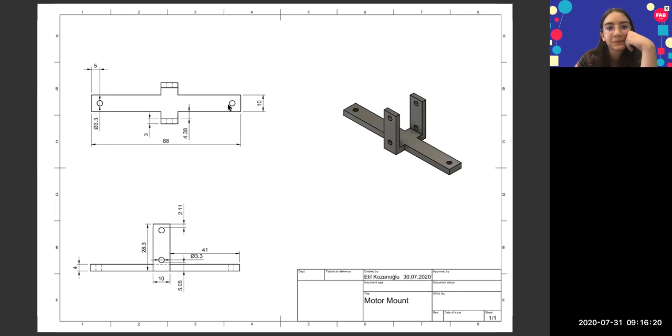First, we're going to start with 3D designing parts of our robot. For that, open Fusion 360 software on your computer. It should look like this after you created your account. First, I want to show you a demonstration of what we will design.

Unfortunately, because of our limited time, we're not going to be able to build this entirely. But we will be able to design the motor mount you see over here and the chassis. So let's start with the motor mounts.

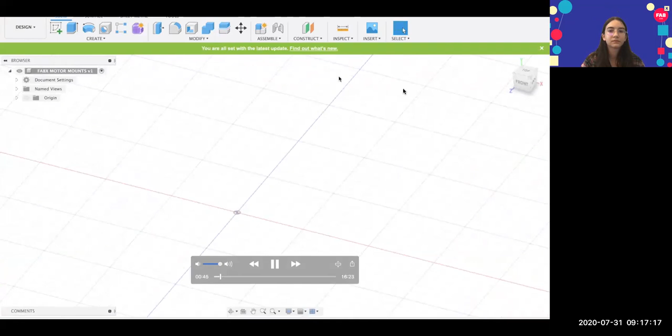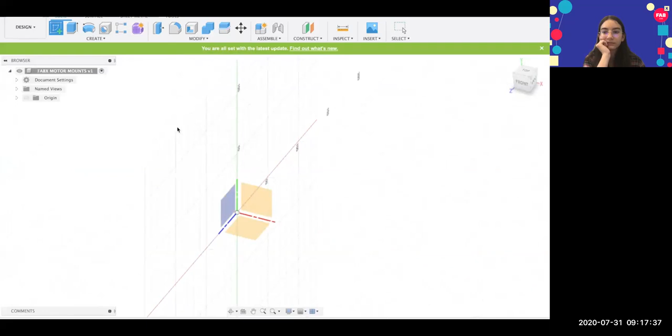I'm going to start with creating a sketch, which is a 2D drawing to define your design and be made 3D later on. To start our sketch, I select Create Sketch from the Create menu, or you can just click on the sketch item right above the create menu. Now I select which plane I want my sketch to be on, which is XZ for our case.

As you can see from this bar, we're in the sketch mode. So our create menu has tools for sketch design, like this. I will first sketch the base, which is this part.

So for that, I first need to draw a rectangle. From the create menu, I go to rectangle, then to 2-point rectangle, or simply press R on my keyboard. Now my cursor has a cross attached to it.

I click on the point I want my first corner to be, which is the origin point for our case. Then I could have dragged my cursor to the second corner, but since we have exact measures for a rectangle, I will put those parameters in.

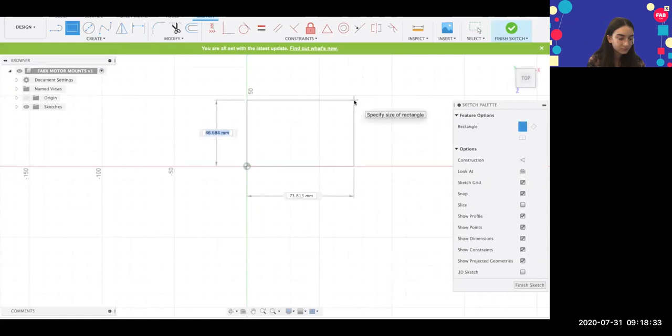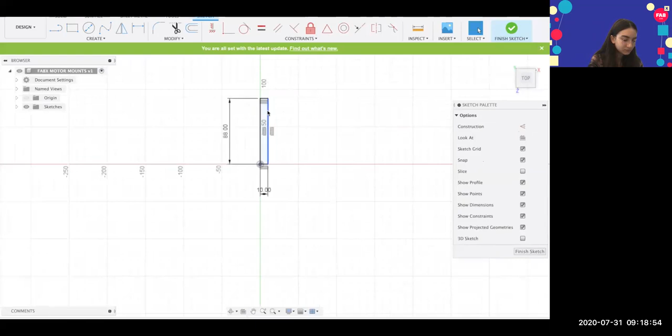The length will be 88 millimeters. Then I press the tab key on my keyboard to specify the width, which is 10 millimeters, and lastly press enter to finish the rectangle. So it should look like this when you're done.

Now we're going to create another rectangle parallel to this one, which will represent this length over here. So I go to the create menu, select 2-point rectangle from there, and choose a random point on the edge of this rectangle to specify as my first point.

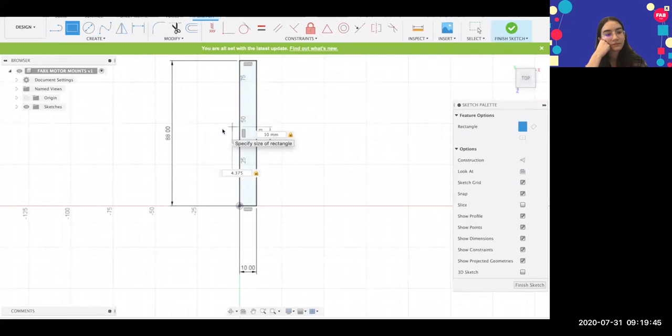It will have a length of 10 millimeters and a width of 4.375 millimeters. So I press tab and then write 4.375, and I'm done. So I put in the length value, then press the tab key on my keyboard and then put the width. Well, I told you to create your rectangle at a random place.

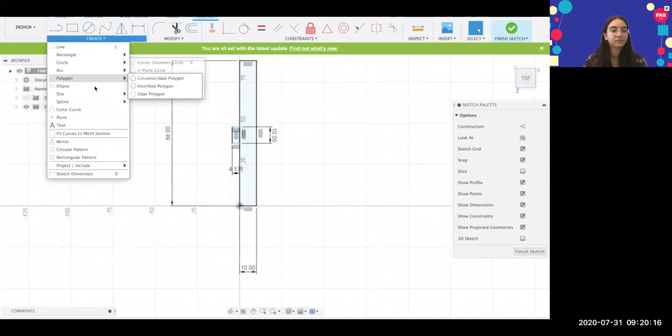But on the motor mounts, as you see over here, their place is specified. To move our smaller rectangle over here to a specific place, we could go to the create menu and then sketch dimension, or simply press D on your keyboard.

With this specific function, we can adjust the measurements of our sketch. I want my rectangle to be exactly 41 millimeters away from this corner. So I select this corner and drag my cursor to select this edge of my smaller rectangle and drag it along this way.

And hit enter. Okay, so now I think you should be able to draw your sketch and do the things I did. If you have questions, ask them on the chat. I want to give you some time to finish your sketch until this point. If you downloaded and created a Fusion account, it would be great if you did it with the video.

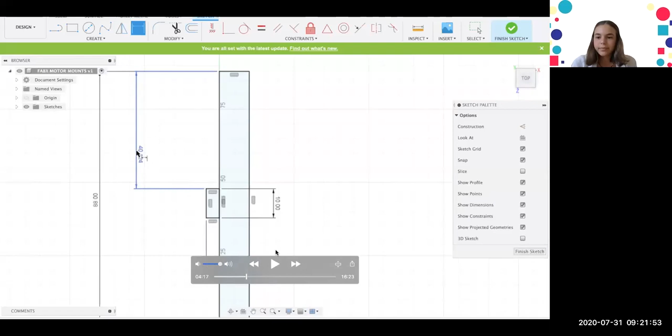Okay, so if you have any questions, please ask them in the chat. And if there is no question, we could continue, or you could say stop for another minute or something. I think we continue, Elif. Okay, you can write in the chat, right? Participants can write in the chat. Yeah, if you can't, you can just unmute yourself. Okay, we can continue. Okay.

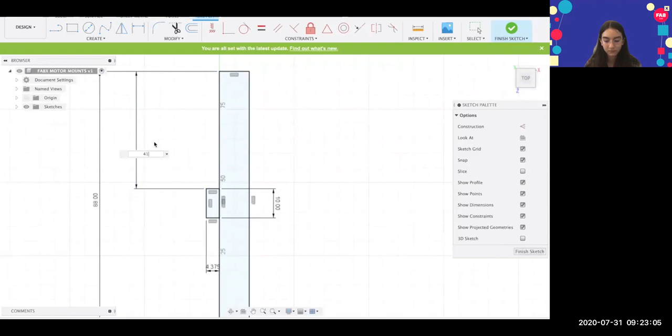Now it shows me the length between this rectangle and this corner. To adjust it, I double click on the dimension and enter whatever I want it to be, 41 millimeters for our case, and hit enter.

Now I will draw another rectangle right behind this one, so it will be over here. This length will be 10 millimeters again. So I go to the create menu, rectangle, 2-point rectangle.

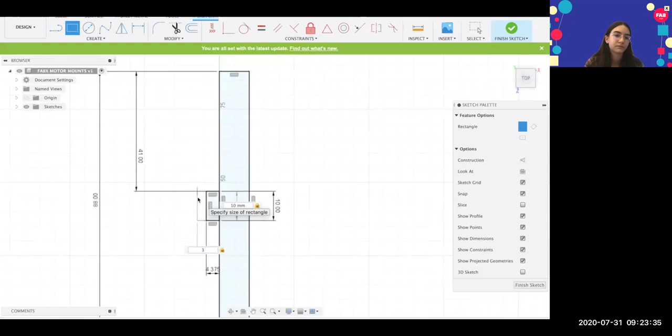This length will be 10 millimeters. Then I press tab on my keyboard and its width will be 3 millimeters and hit enter. So this rectangle will be right here, this part. It is drawn as another rectangle because it will be higher than the base, so its height will be different.

Now we must do the same thing we did here for this side as well. But doing things over and over may be a very inefficient use of time. Fortunately, Fusion 360 has a great function to make things go faster. It's called mirror. The mirror tool requires a symmetry line from which it will reflect desired elements.

I will create my symmetry line from the middle of this edge. So I select the line tool from the create menu and click on construction on my sketch palette. You don't really need to click on construction, but I use it because it separates the main parts of my sketch from the parts that are only for constructing other elements.

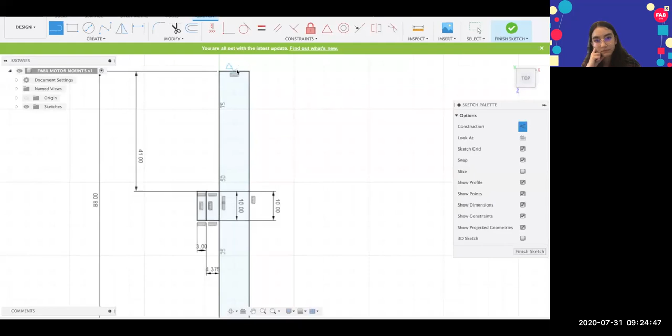I drive my cursor to the edge, across this edge, and stop when I see a triangle or delta sign right above my cursor. This shows that I am currently in the middle of the line. So I click on that point and drag the line all the way down to the parallel edge with 90 degrees and click again. Now that I have my mirror or symmetry line, I go to the create menu. So here you can draw your construction line, and then we're gonna move on to the mirror tool.

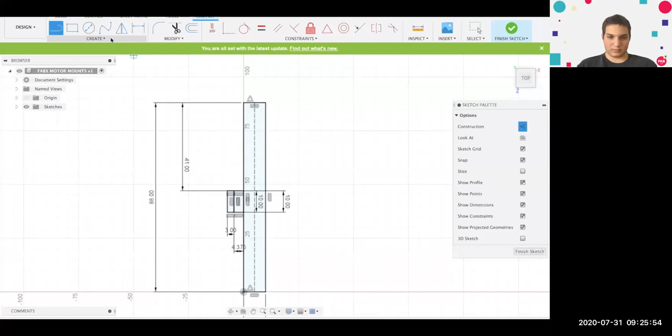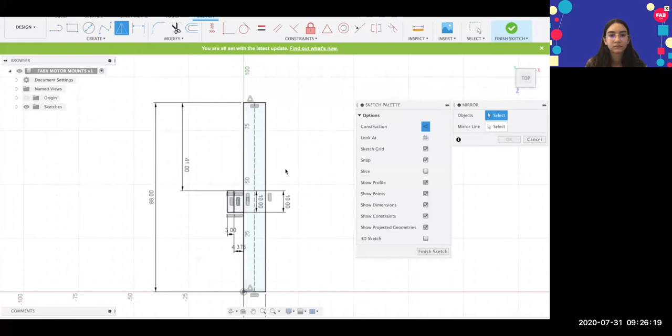And select the mirror tool from there. Now you see objects over here. It asks me what parts I want to reflect, so I choose every single line on this side. Let's make it a little bit bigger. After I selected all of them, I go ahead and click on where it writes mirror line and choose the construction line I drew earlier, this one. Now click OK, and we should get the rectangles right on this edge as well.

As you may have noticed, our sketch looks a bit messy because of these constraints Fusion 360 adds as a default. To avoid this, we should simply uncheck the box where it says Show Constraints.

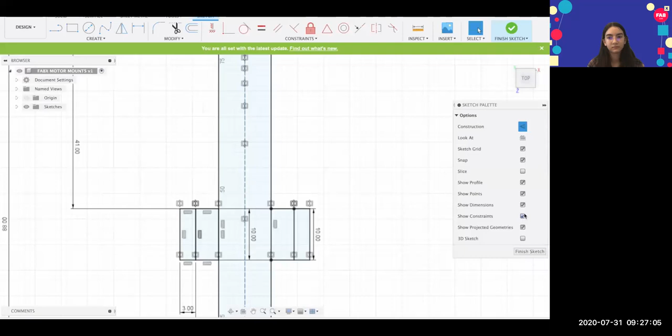And now they're gone. Okay, so if anyone had any problem with the mirror tool, please unmute yourself or ask your question in the chat.

Okay, I have a question here. Although it might not be relevant here, but I want to ask about Fusion 360. Have you made any comparison between Fusion 360 and SketchUp? And which one do you think suits you best?

Well, I can comment on that. SketchUp is generally used for architecture, and sometimes the STL files that are exported aren't suitable for 3D printing. So for robotics, I think Fusion 360 is better. I'm not sure about SketchUp, but Fusion 360 is a parametric modeling tool, so it has a timeline, and you can edit your past actions, and the design will update accordingly. So it's better for complicated designs.

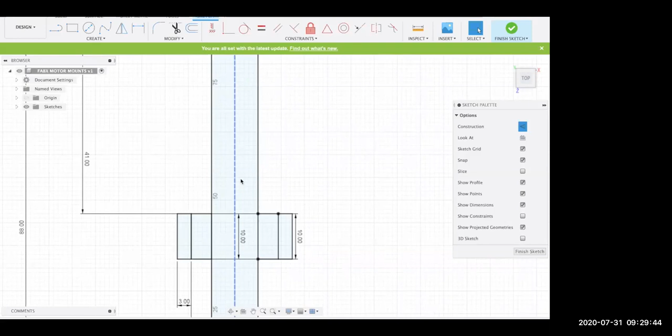Okay, so if there aren't any questions, we're gonna move on. Now let's draw these holes on our sketch. They will be part of the main elements on our sketch. So I click on construction again to deactivate the construction mode.

So then we go to the create menu, circle, and 2-point circle. The 2-point circle will allow us to choose a point on a diameter of the circle we want to draw, and its diameter. Hence, I click on a random point on our construction line, maybe over here, and drag my cursor, then specify my circle's diameter, which is exactly 3.3 millimeters.

Then I hit enter. Then from the create menu again, I go to sketch dimension, or simply press D on my keyboard. This way I can determine the distance between this edge and the center of my circle. I click on the circle, then on the line, and drag my cursor to see the distance between them. Now I can alter it by double-clicking on the value to exactly 5 millimeters.

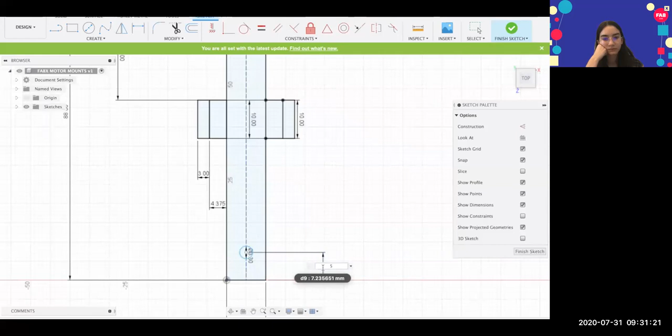Well, we need the same circle for the other side as well, right? So I guess you can guess which tool we're gonna use. It would be great if you could write it in the chat box. So we need the same circle on the other side as well, with the same diameter and measures.

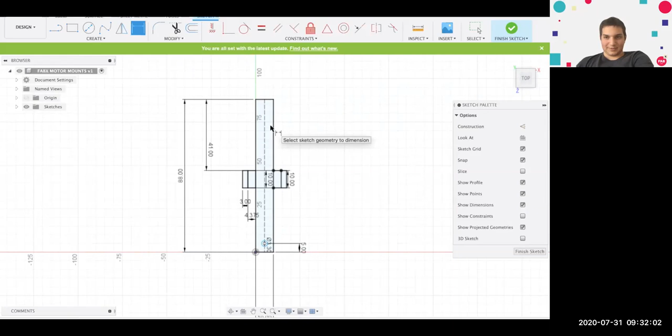Any guesses? Yeah, that's correct. It's the correct tool, yes.

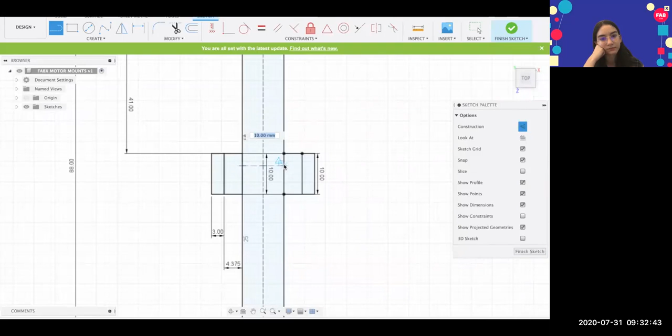Okay, let's continue. We can use the mirror tool again. I select the line from the create menu, then activate the construction mode and drag my cursor on this edge, stopping when I see the delta or triangle sign above my cursor, which means I'm in the middle of this edge. I click on that point and drag the line until it reaches this edge, then click again. Now I have my symmetry line or mirror line.

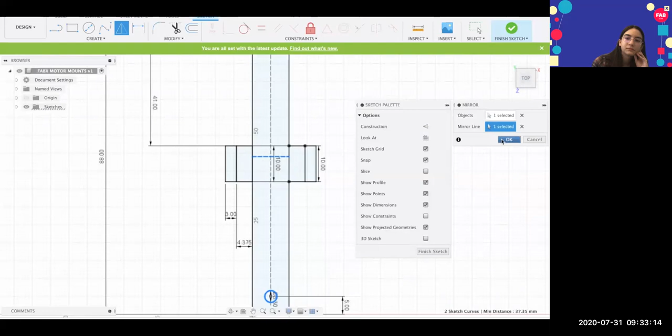After that, I go to the Create menu and select Mirror. As objects, I select my freshly made circle, and as the mirror line, I choose this construction line we made earlier. Then I hit OK. When I hit OK, it should look just like this.

Now we're done with our base, so we can click on Finish Sketch over here on the upper right corner.

Okay, so did anyone have any problem? It can be about the previous tools or the last one we did, the mirror tool.

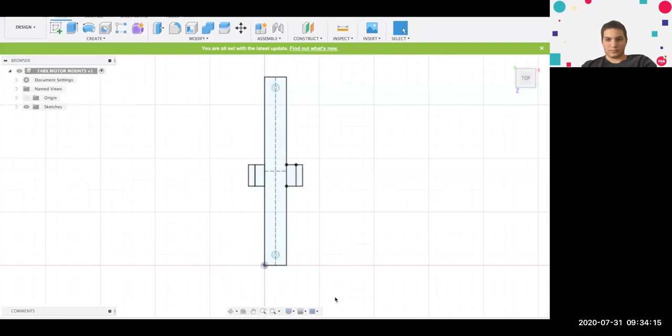Okay, we can continue.

After those, we're done with our sketch and can start making it three-dimensional. For this, from the Create menu, I will use the Extrude command, or you can simply hit E on your keyboard. I will select the parts I want to extrude, which are these.

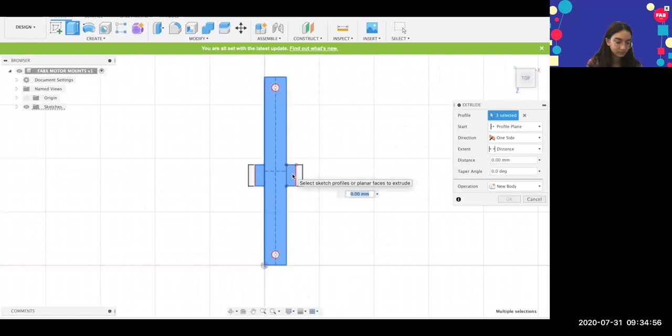This one, and this one. To select more than one part, I constantly press Shift on my keyboard and click on those parts. I don't select the circles over here because I want them to be holes in my design, like in this one.

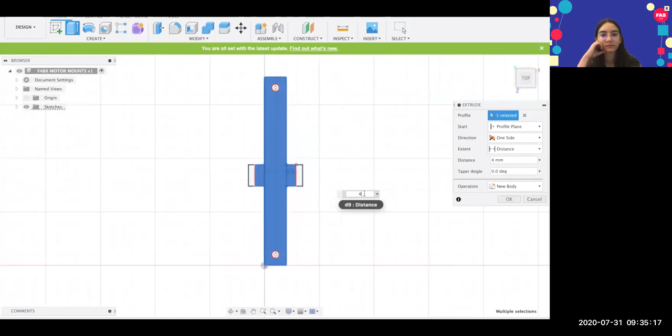As you can see here, Fusion 360 wants me to report the height, and that is 4 millimeters for our motor mounts. If I hit enter, I should have a three-dimensional part just like this. You can view it or see that it's three-dimensional using the view cube right about here.

I didn't extrude the smaller parts over here, right? That is because they will have a different height measurement because they represent these heights. But now I can't see my sketch anymore.

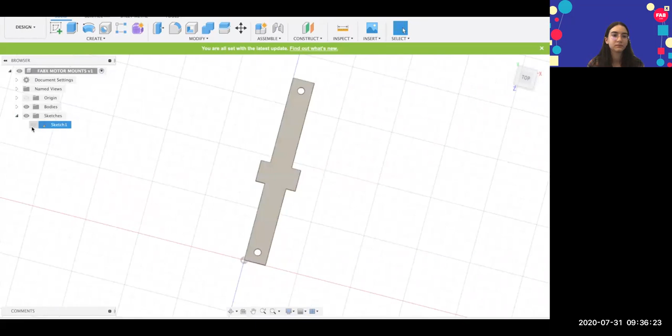Okay, so I'm going to continue. I click on the tiny arrow near the sketches menu and unhide my sketch, so I can see my sketch right now.

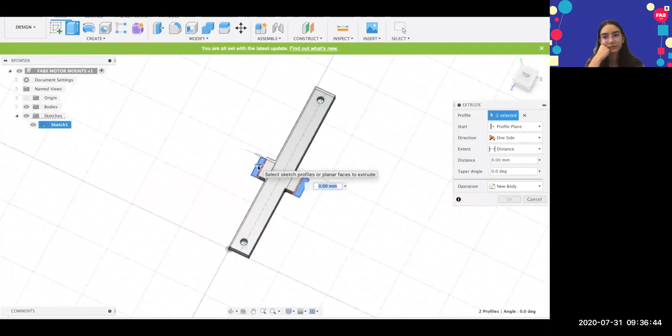Now I can extrude those parts. I go to the Create menu and click on Extrude, or hit E on my keyboard, such that they will have a height of 28.26 millimeters. Then I hit enter.

Lastly, we should add the holes on these parts, these holes. To do that, we go to the Create menu and create another sketch.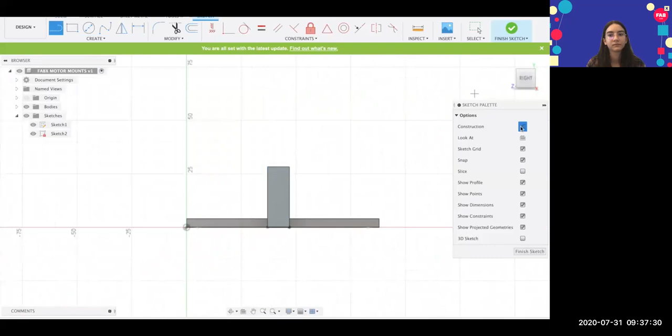For my plane, I select the sides that are looking outside over here, so my sketch will now be on this surface. Then I go to the Create menu and select the Line tool and click on Construction, because this one will not be a major part of my design.

I will drag my cursor along this side until I see the delta or triangle sign above my cursor, which means I'm in the middle of this edge. Then I drag the line for 5.05 millimeters and hit enter.

Then I go to the create menu, circle, and 2-point circle, and deactivate the construction mode. I click on where I left my construction line and specify my diameter as 3.3 millimeters.

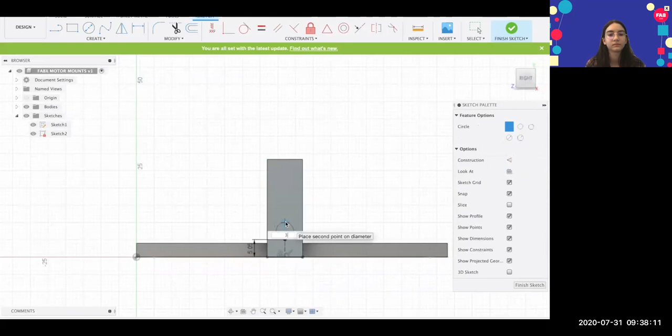Then for the hole above, I go to the create menu and select the line tool again as a construction line. I activate the construction mode and drag my cursor along this edge until I see the delta or triangle sign. I click on this point, drag my cursor, and specify this length as 2.112 millimeters, then hit enter.

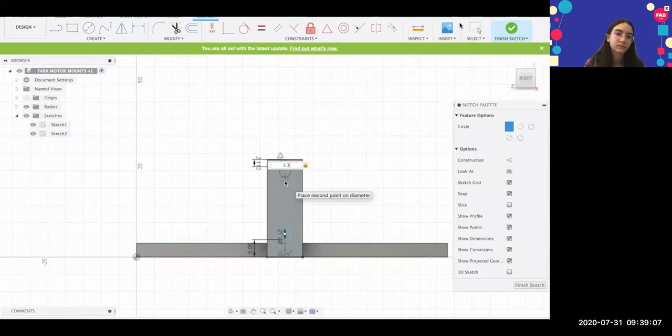Then from the create menu, I go to the circle and 2-point circle. I deactivate the construction mode again and select my first point as this point where I finished my construction line. I click on that point and specify my diameter as 3.3 millimeters, just like the last one, and hit enter. As we're done with this sketch as well, I can now click on Finish Sketch on the upper right corner over here.

Then I go to the create menu and then extrude, or simply press E on my keyboard, and select those circles while pressing shift.

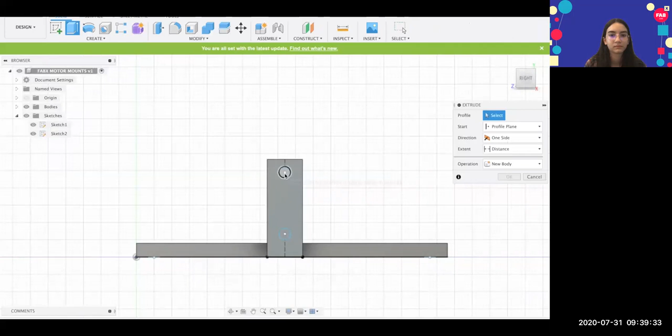Extrude doesn't only help us create material, but we can use it to cut or remove material as well. On the extrude menu, you can see the part where it writes operation. I change the operation from new body to cut, so that when I extrude my sketch, it will remove material wherever it intersects with one.

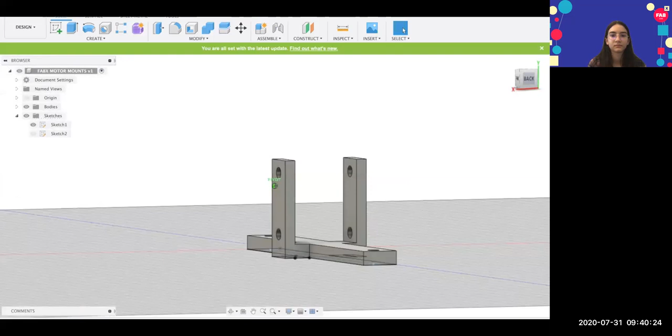So I extrude it on cut operation all the way back until I get those holes on the other side as well. Then I hit OK. When you're finished, it should look just like this. So this way we created our motor mounts and can move on designing the chassis.

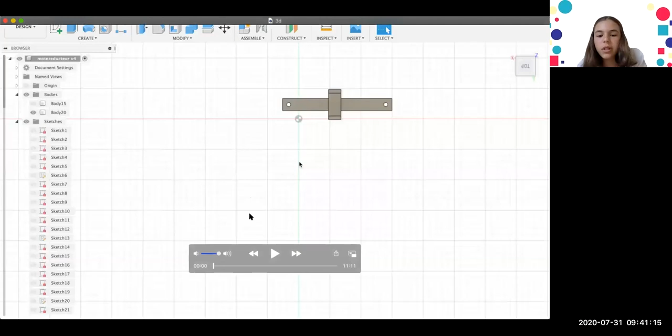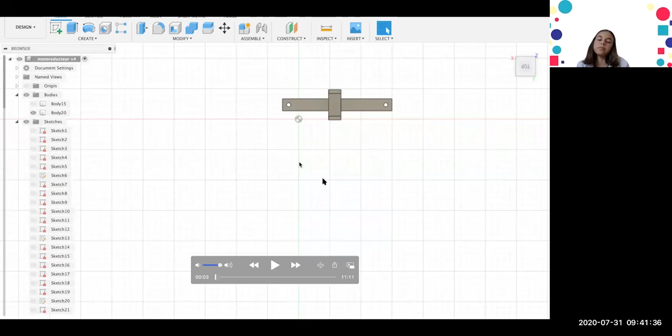Okay, so can you see my screen? Yes, okay. Now we finished designing the motor mount, and we're gonna move on with the chassis, with the frame. Again, if you have any questions during the video, you can ask through the chat.

As you can see from the complete design, the chassis holds every other part of the robot, and we're gonna attach the motor mount and the camera mount to the frame. So now we have our motor mount on our screen. We're not gonna use that for a little while. So to start designing the frame...

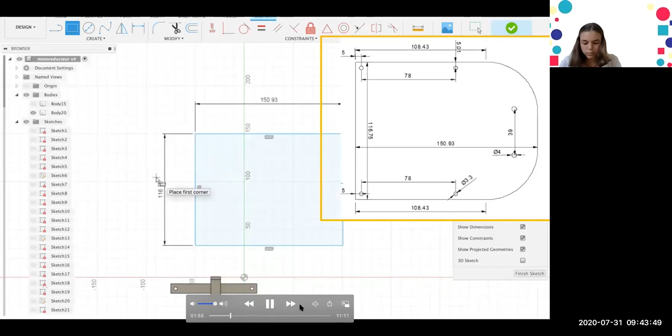As you can see from the image on the right, there are arcs on the front of the frame. For that, we're gonna go to the Modify menu and then click Fillet. Fillet just puts an arc to the area that we chose. So now we're gonna select 2 lines, and it automatically creates it. We're gonna write 40 for the radius, and then click enter.

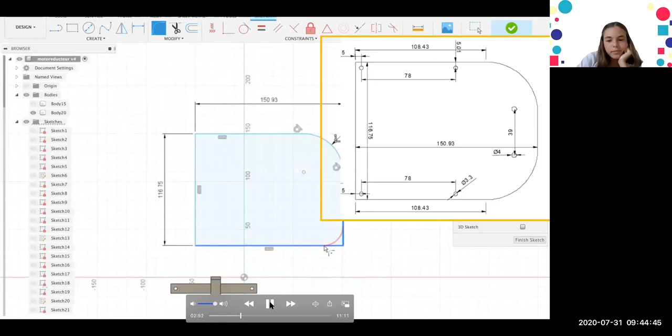We're gonna do the same thing for the other side. So go to Modify menu, click Fillet, choose the sides, and write 40. So is everyone okay until this point? Are there any problems? I guess not, so just a second. Is everybody okay? Okay, you can continue.

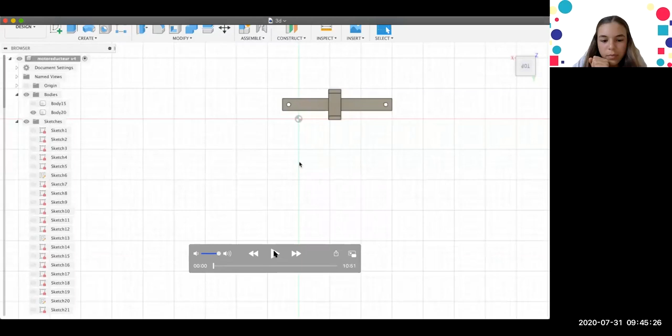Write the radius, and then click enter. We're gonna do the same thing for the other side. So go to Modify menu, click Fillet, choose the sides, and write 40. So now we have our basic shape.

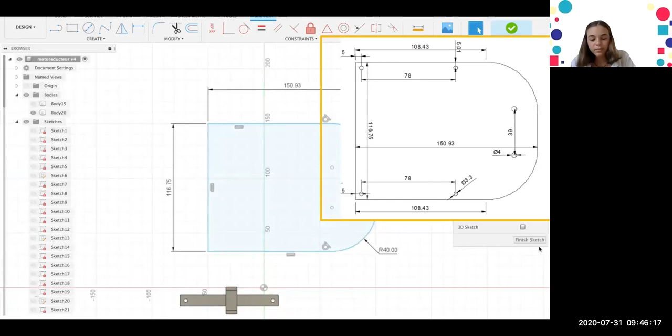Now we're gonna do the holes. For the holes on both sides, not on the front, we're gonna use the motor mount to place the holes on the right place. For that, we first click Finish Sketch, and then we click on our sketch, click Extrude, and turn the sketch into a 3D shape. It's gonna be 3 millimeters, so we write 3. Now we have the 3D shape of our chassis.

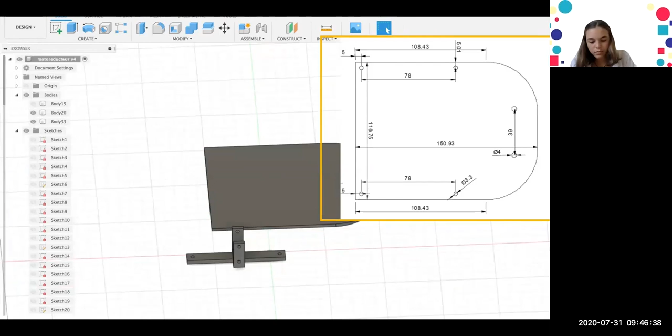Now we're gonna move the motor mount to here and then create the holes. So first we have to select the motor mount. You can simply click the name of the motor mount from the menu on the left. So it's body 20 for me, but the name is different for everyone. I'm clicking body 20 here, and then I can right click and select move/copy, or I can click M on my keyboard. Now we just want to move this to right here.

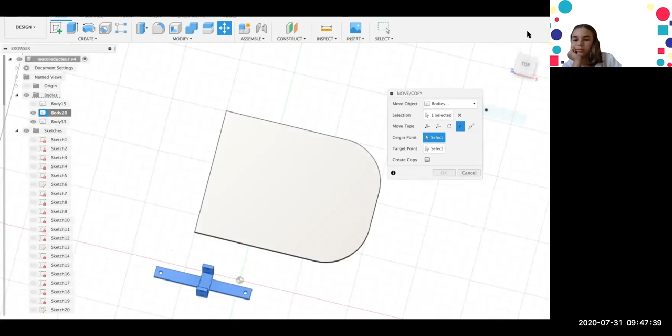So for this, point-to-point move type is really useful. I'm just gonna click point-to-point from here, and then select the point on the motor mount that I wanna move. So it's gonna be this. The first point will be on the motor mount because we're gonna move the motor mount, not the chassis.

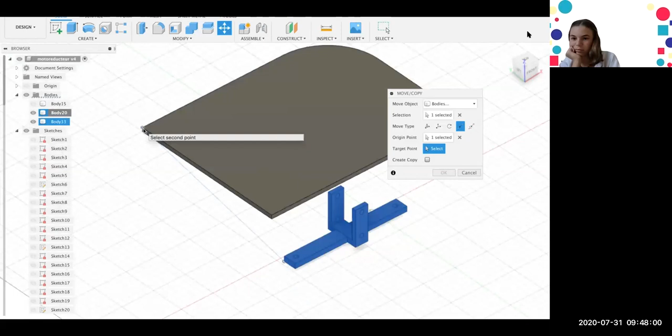So I'm selecting the points, and then I'm gonna select this point as my second point. As you can see, it just moved to where I wanted, and then I'm gonna click OK. So now we can create a copy of motor mount to do the same thing for the other side.

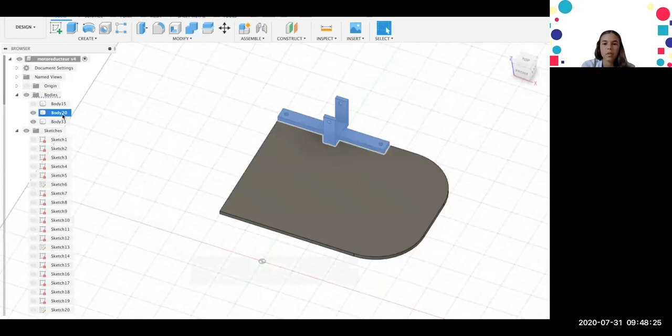We have to select the complete motor mount shape again, so I'm just gonna click body 20 here. I can do Command C or Control C to create a copy, or I can right click and select Move/Copy and then check the Create a Copy box. I'm just gonna do Command C and Command V.

So now I have the second motor mount, and I'm gonna just move it. Again, we're gonna do point to point, so first we're selecting the points on the motor mount and then the chassis. So now we have it.

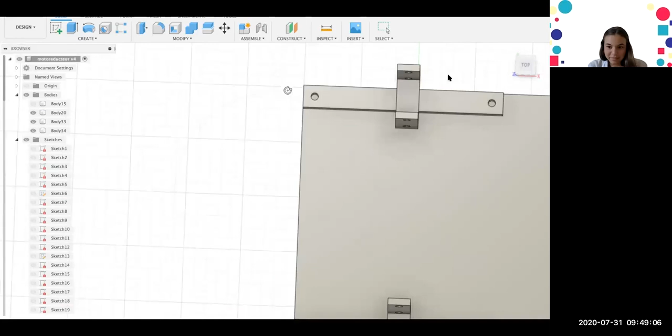The next thing is creating the holes. So we're gonna create the holes on the chassis. For that, we're gonna click Create a Sketch and then select the plane.

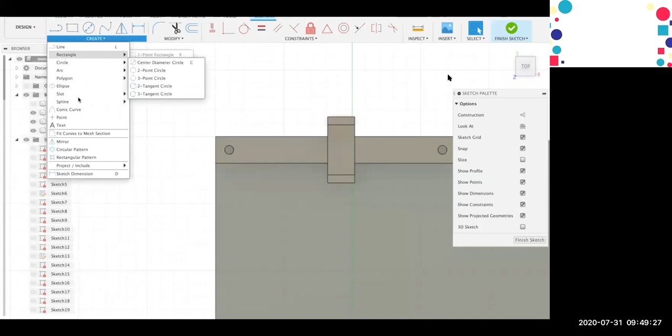Now we're gonna go to the Create menu and then click Project/Include and then click Project. So we're clicking Project, and then it wants us to click a shape, a geometry. For that, we're gonna select this circle and the other circles, but be careful to select just the circle, not the shapes, not the other surrounding shapes.

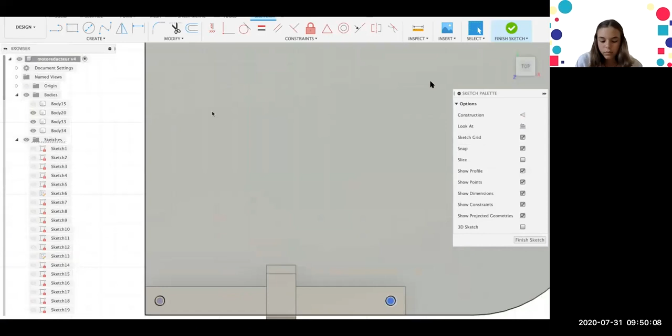So we're selecting all the circles. As you can see, we have 4 selected shapes, and then we click OK. So now we have the circles as a sketch. The only thing we have to do is first click Finish Sketch, and then we're just gonna extrude the sketches. So click Extrude on the top menu, and then we're gonna select all the circles.

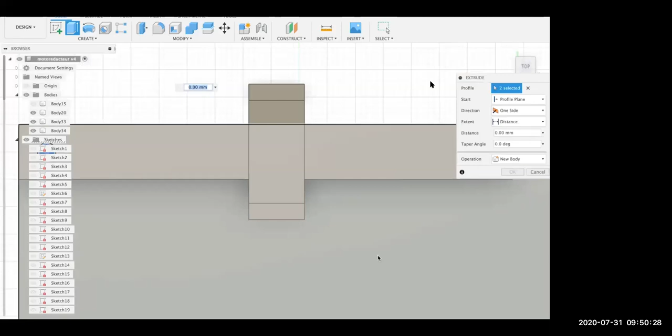I want to come in here to ask a question. This shows sketches, so there is an enumeration of a lot of sketches, like 1 to 19. So what are these here?

Can you ask the question again? I couldn't. Yes, you say that those holes, 4 holes become 4 sketches, right? So I'm asking why it's showing 19 sketches in this design. Are there 19 sketches in this design?

Yeah, so this project that I'm designing on has more sketches because that's where the complete design is, but that's not what we need. It's not something important that you should worry about. Sure, okay, I'm just trying to understand the software. It includes the other parts as well. Okay, let's continue.

After we selected all the circles, we're gonna use this arrow to pull the sketches down to create a hole. And then we're gonna click Enter. So now we have 4 holes aligned with the holes on the motor mount.

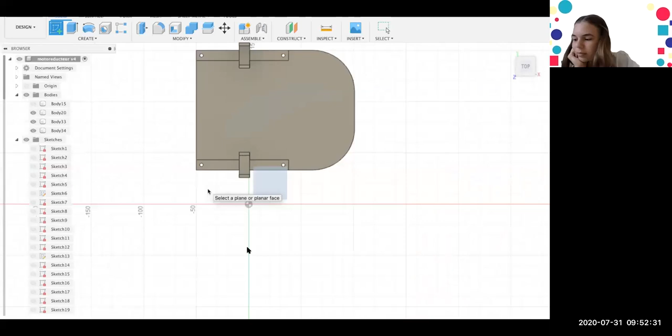So first we're gonna create a circle. It doesn't matter where you create the circle. The diameter will be 4 millimeters.

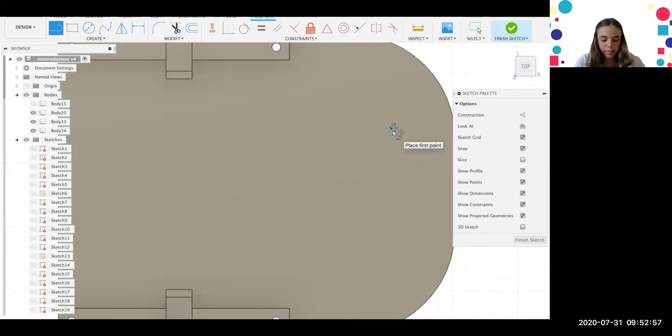And now I'm just gonna create a line from the sketch menu to see the length between the holes. I'm gonna do 39 and then click enter again. So we're gonna create one more circle with 4 millimeters of diameter and then press enter.

So we have the circles here. We're not gonna use the line anymore, it was just to measure the length. And then we're gonna click finish sketch, so we can delete the line.

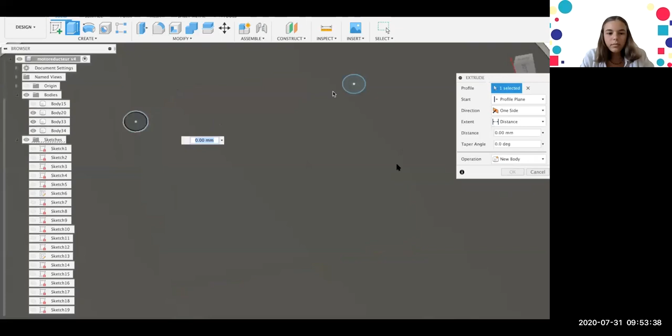Now we have to select the circles to extrude them and create a hole. So we're gonna select the circle. After we click the extrude on the menu, and then we're just gonna pull the arrow. Now we have 2 holes for the camera mount.

So this is what the design should look like at the end. We can also change the color of the parts by right-clicking and then selecting appearance.

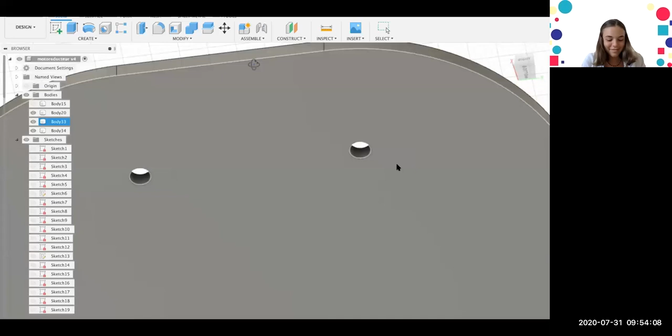And then we can make it whichever color we want.

To print our design, we have to move the motor mounts away from the chassis to print properly. So don't forget to click and select the first free move type to move the shape, move the body. You can just move it like this and then send our design to the 3D printer.

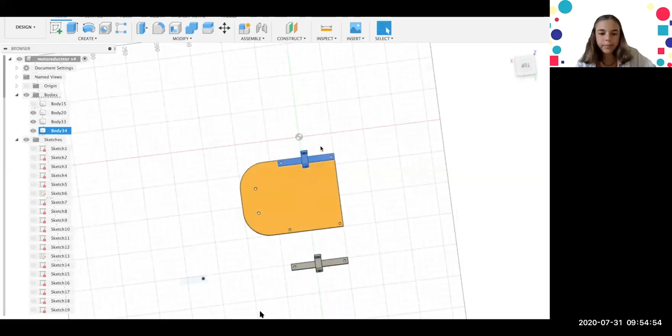Okay, so that was it. Are there any questions about the 3D designs? Okay, then we can continue with electronics.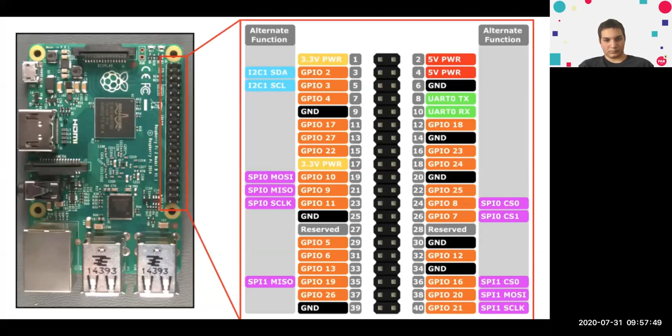In our robot, we are going to use these 5-volt pins, a ground pin - you can use whichever one you want - and a few GPIO pins. GPIO stands for General Purpose Input Output, so it can be configured either as an input or an output pin. As an output pin, it can output a voltage of 3.3 volts, and as an input pin, it can receive voltage from different sensors, so the robot can interact with the real world.

We will also use a breadboard, which is a very useful tool to prototype with electronics without being bothered with all the soldering and desoldering. The breadboard that we included in the materials list only has these horizontal connected pins, which are connected as these yellow and green lines show. These 5 pins are connected with a metal plate under the pins.

And if you have a breadboard with plus and minus parts, they are connected vertically. So all these minus pins are connected like this, as my pointer shows, and the plus or power pins are shown like this. These are so that you can plug the 5-volt and ground pins into the designated slots, and you don't have to always connect different 5-volt and ground pins to these pins. You can just use these for connecting the GPIO pins or the signal pins.

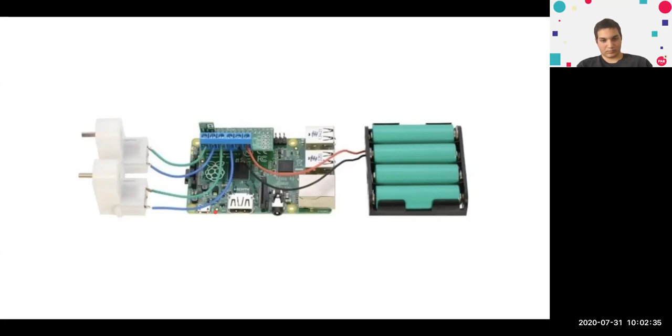The distance sensor we are going to use is the HC-SR04 ultrasonic distance sensor. The working principle of the sensor is similar to echolocation in bats, in that it sends a sound wave and uses the time it takes for the sound wave to get back to the sensor to understand how far a wall or an obstacle is from the robot.

So it has two speakers and vibration sensors like this. The one marked with T is the transmitter, and the one marked with R is the receiver. The transmitter sends the sound wave, and the receiver receives it. The sensor transfers that time data to the Raspberry Pi.

It has 4 pins. The one marked VCC is the 5-volt input pin, so you connect it to the 5-volt pins on the Raspberry Pi. The trig pin is the input pin, which will be plugged into one of the GPIO pins, and that GPIO pin has to be configured as an output pin. We'll show that in the programming part, so it can send data to the sensor as to when to send the sound wave. The echo pin is the output pin, and this will also be plugged into another GPIO pin. This gives the Raspberry Pi the time data we use to calculate the distance between the sensor and the obstacle. The ground pin, GND, is connected to ground, sometimes marked as 0 volts.

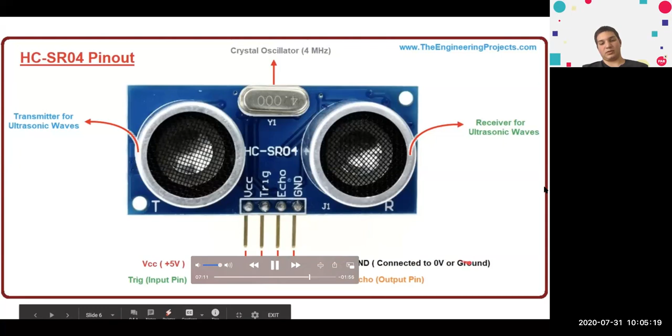So the trig pin is the input pin of the ultrasonic sensor, so the GPIO pin we connected has to be configured as output, so it sends voltage to the ultrasonic sensor. The one marked as output pin here has to be configured as an input pin on the Raspberry Pi. In the pin layout we showed, it was marked as ground or GND.

We are also going to use this servo motor, which is just a geared DC motor with a potentiometer inside. It can only turn 180 degrees, and you can control the rotation angle really precisely. This has 3 pins: a VCC, which is 5-volt input, ground, and a signal pin. This signal pin will be connected to a GPIO pin configured as output in the later part of the workshop.

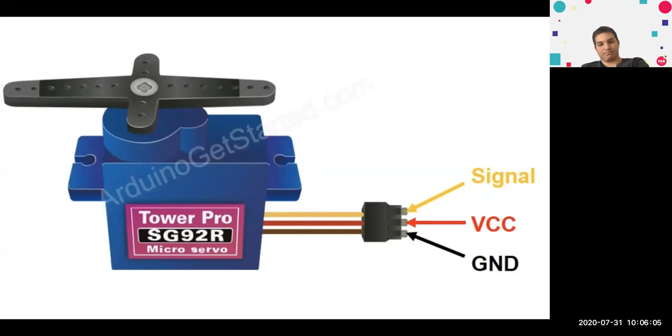The motor driver doesn't use all the pins on the Raspberry Pi, but you can't plug these in if the motor driver is on the Raspberry Pi, so longer pins are necessary. If you don't have the stackable header for the DRV motor driver, you can just make these connections first, then try these two together, and try the motor driver separately, since you can't connect them together. Now you can just take a screenshot, or we can wait for you to do the connections.

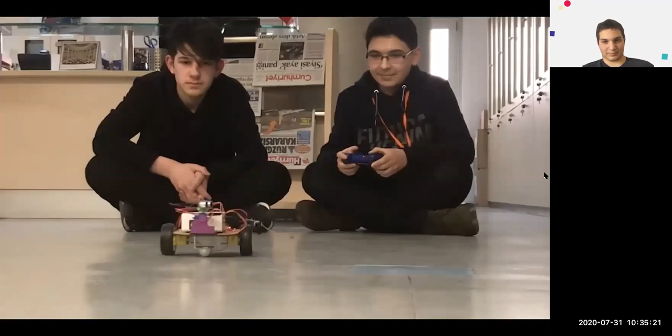And this is like the recap video of our workshop, by the way, the competition. By the way, this event was 1 or 2 weeks before the first case of coronavirus happened in Turkey, so we were really lucky.

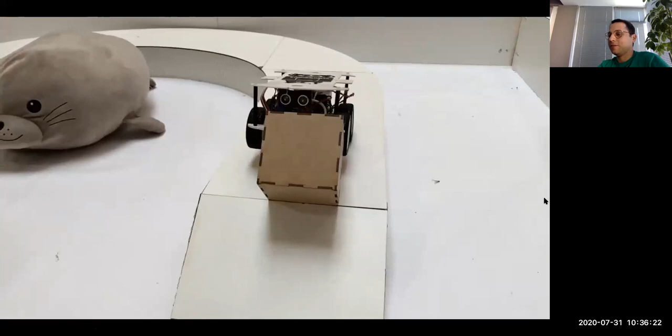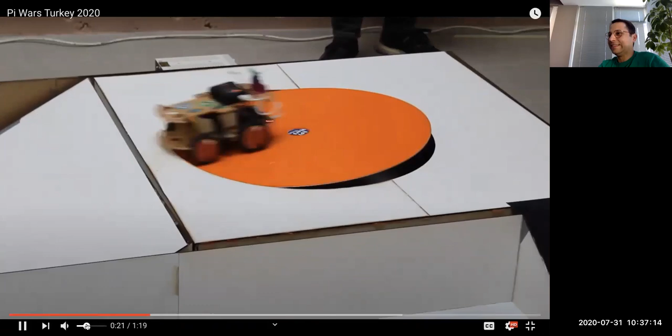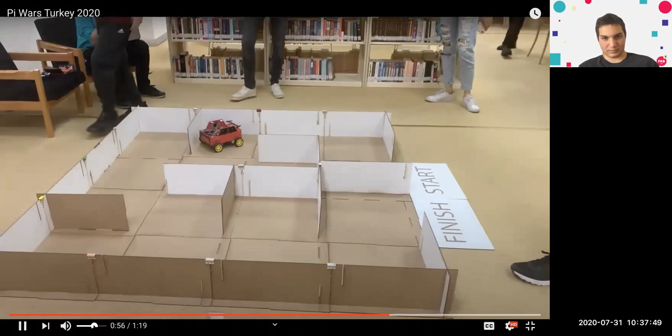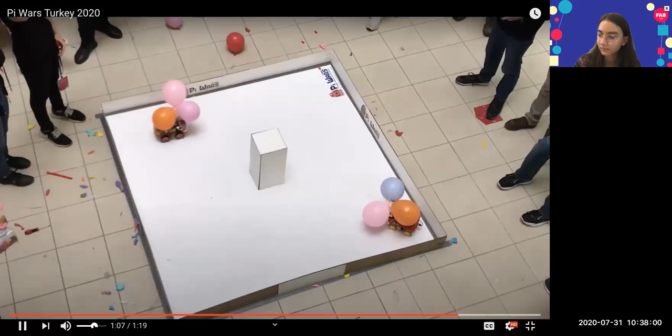Before the workshop, lots of students don't have any idea or knowledge about robotics. They learn everything from scratch most of the time.

We made the workshop like a starter for them and gave them a 1 month long build season. So every robot that you see in this video, they built it in a month from scratch. By the way, all of the maps, the challenge areas and the maps, we created those.

Okay, so let's continue.